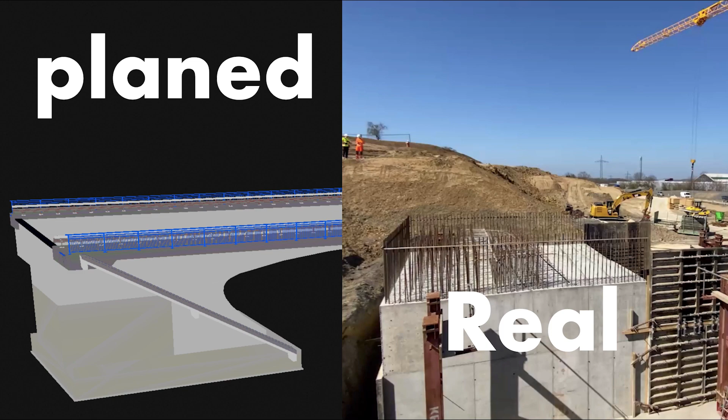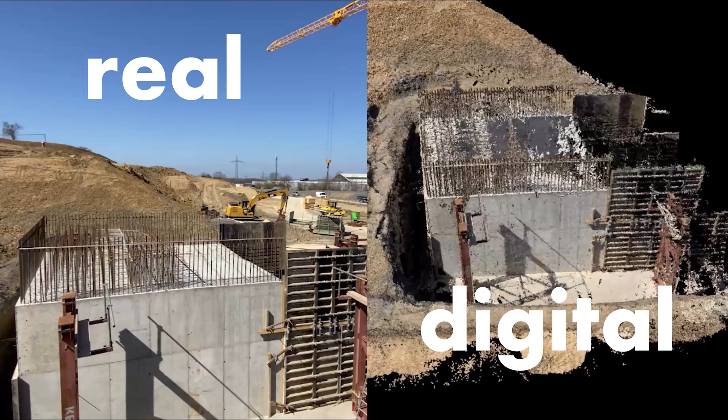We believe you can't have a real BIM project without a 3D as-built documentation. With BIM, you plan the whole construction site digitally. Then you have to bring the geometry into the real world. After that, the important information needs to be back in the digital as-built model.

So, do you feel what the challenge is? Yes, it needs flawless and continuous documentation, especially on huge infrastructure projects. But it is not possible to have a professional surveyor with high-tech equipment on each site all the time, or just in time.

Normally they work in teams of 2 to 3 people on different sites each day. The problem can be solved by different workers who are on the same site each day. They only need an easy tool for that.

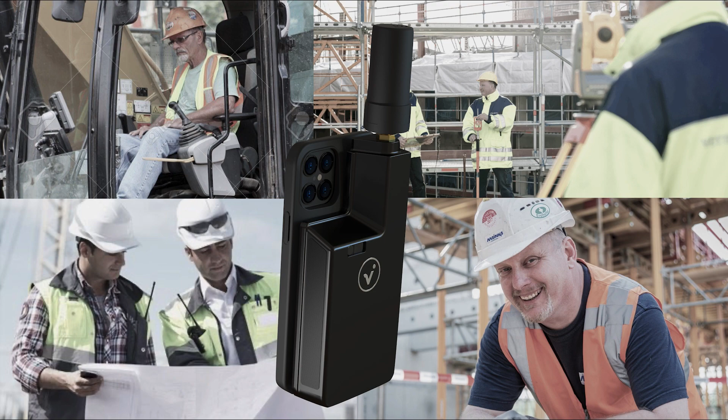We call this tool viDoc. And the viDoc enables smart documentation. The viDoc is a multi-measurement tool for applications in structure from motion, GIS and GNSS, with 1 centimeter accuracy.

Therefore, we use different measurement tools, like a camera in your smartphone or provided LiDAR sensors, a front laser for GIS solutions, and a bottom laser like in a GNSS rover.

viDoc is a hardware add-on for your iPhone or iPad. Absolutely easy to use and ready in a few seconds. It can be used by everyone, at every time, and everywhere.

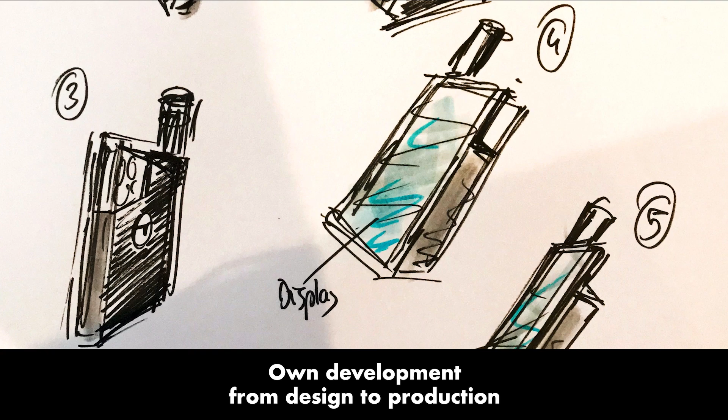This is the leading team behind the scenes, Sidon and me, 2 years ago. We started with our first ideas to solve the problems with as-built documentation on construction sites.

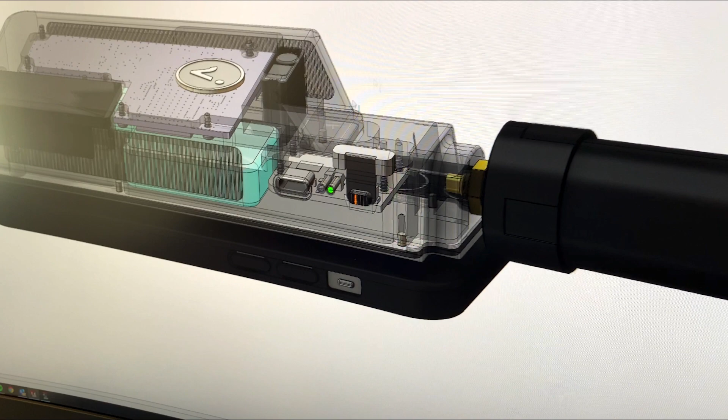1 year ago, we met the team of PIX4D: Florian, Amrita and Christoph. Within a few days, it was clear that PIX4D wanted to have this product for all their customers all over the world.

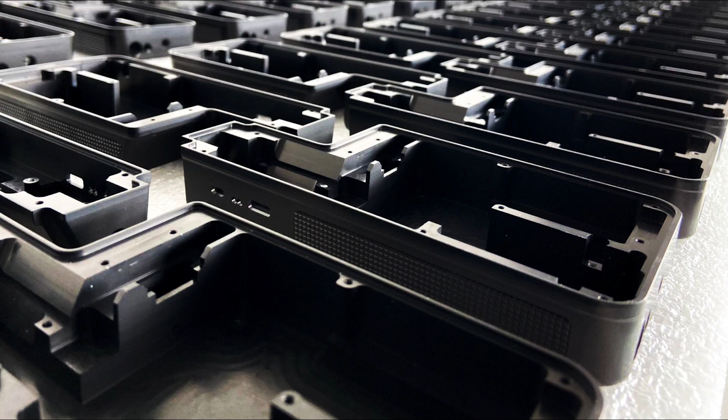That started the race for us to redesign the product, get an SDK, and bring the single production to mass production. For us, the viDoc is our enabler.

The question is, for what? To open our device for use with different applications like PIX4Dcatch, or to work with other global players like RIB and I2.

Christoph said this is the game changer in construction documentation. In the next few years, PIX4D users will take processing 100 times more than now.

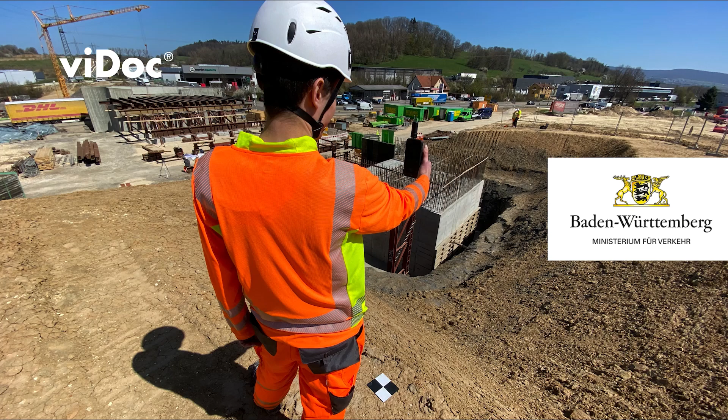And now we will see the viDoc at work. Here the viDoc at the Ministry of Traffic and Digitization in Germany. More than 5 viDocs on 6 different construction sites are running in the first year.

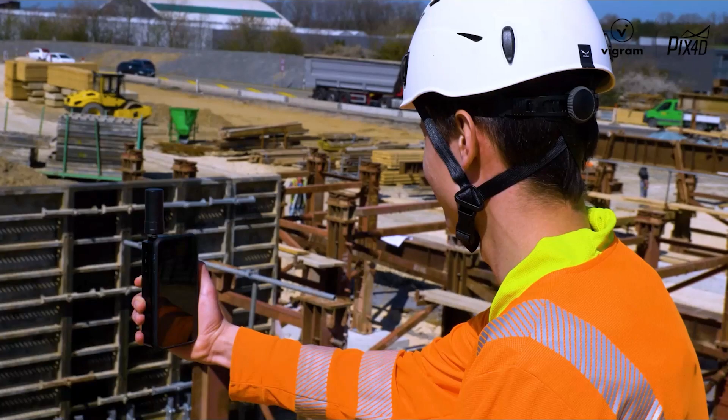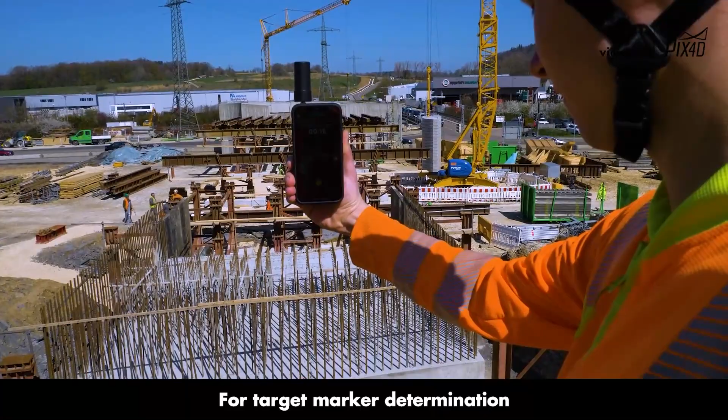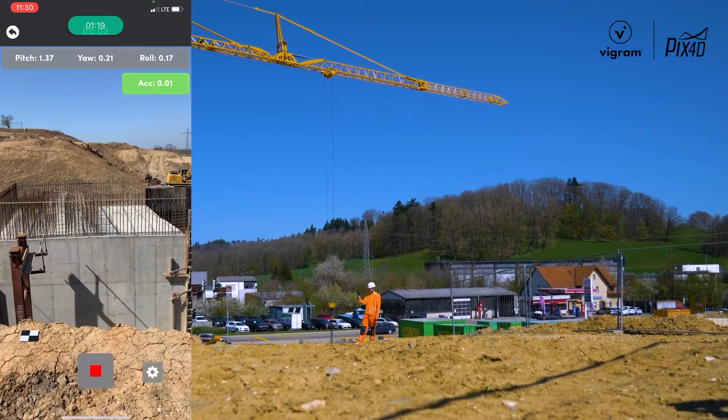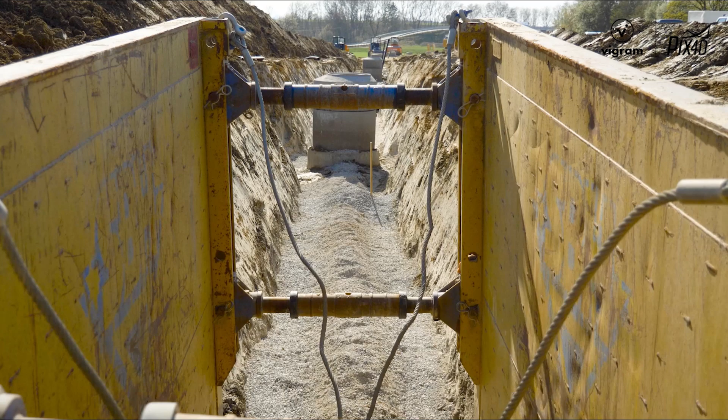Let's have a look at different use cases with the Catch app and the Vigram Site app. And here we see another use case on the same site.

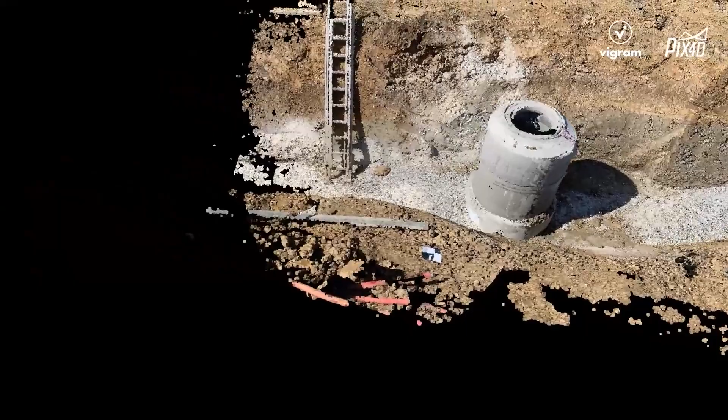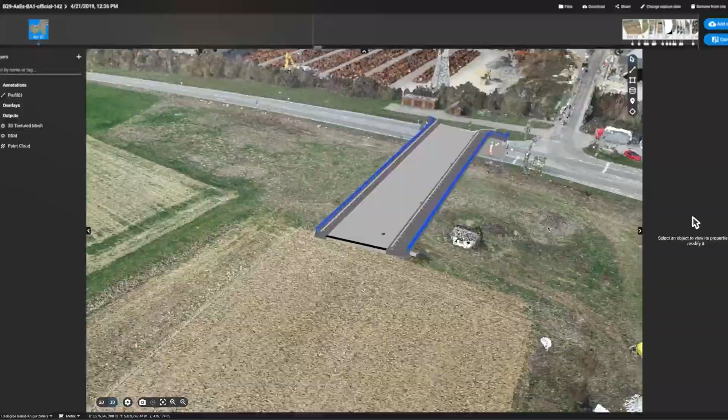So we are using the PIX4D Cloud to check the as-planned to the as-built models.

Another customer and global player, Max Bögl. They are using the viDoc too. They use it in combination with the Vigram Site and the PIX4D Catch app to get the best results ever. It is fast and it is for highly accurate planning.